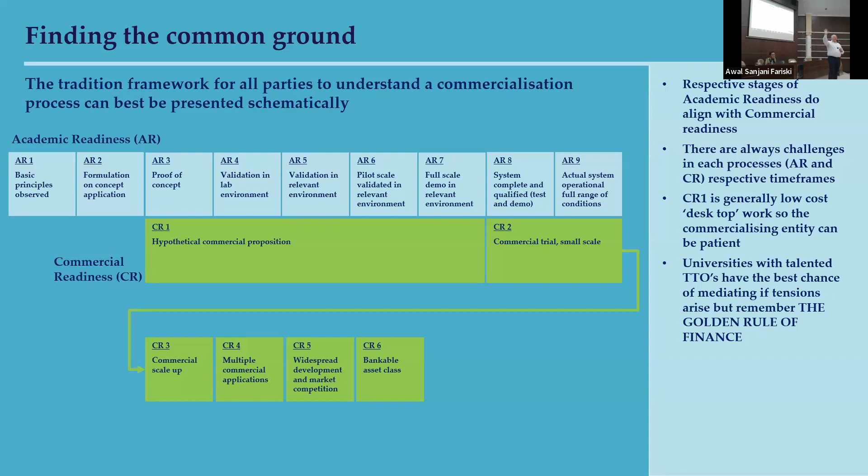And then you can see as the academic process goes through, where you get to systems being complete and qualified, you've done tests and demos, you've got actual system operations across a full range of conditions. So, for example, with our geopolymer cement, when we say full range of conditions from the academic perspective, it might be: does it work at 100 degrees Celsius, and does it work at minus 100 degrees Celsius, because it may get used in Saudi Arabia, it may get used in Mongolia.

So have we tested everything? From the commercial perspective, we then start dovetailing very nicely. We start doing our commercial trials, starting on a small scale, then we'll scale the commercial stuff up. CR3, CR4, we want to see multiple commercial applications to make sure it can work. CR5 is widespread development and market competition.

And then really what we're looking for, CR6, is the reason I used to get paid a lot of dollars at JP Morgan as opposed to standing here now. They would very much call it, in beautiful terminology, has it become a bankable asset class? Simplistically, can I sell it, and can I sell it for $1? That's just the textbook terms for it.

Before moving on, it's important to get academia to understand that kind of framework over the top. Now, most of you in academia are quite process driven. You've got that discipline, especially in engineering sciences, where it's a numeric-based discipline. You're very good at drawing up those plans and flow charts and making it work. That bit you've got down pat.

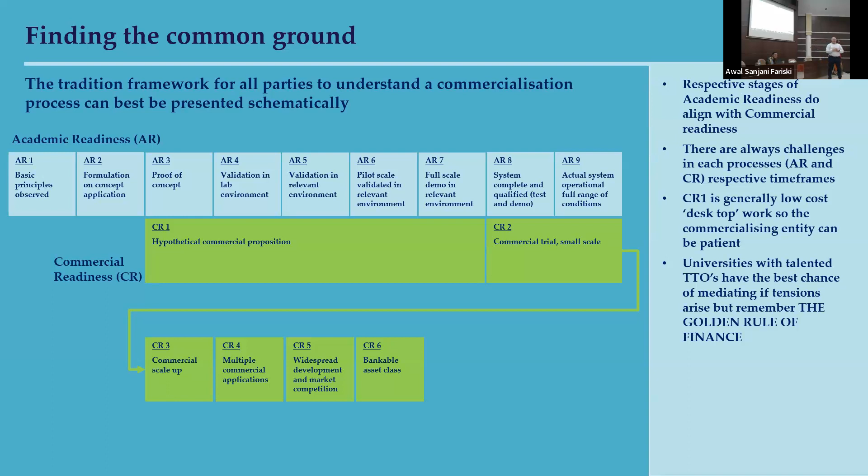So if we can go to the next slide, if you'd be so kind. I've kind of covered this, but I wanted people to admire my ability to find icons on PowerPoint to do this. So a current example, SUVO Strategic Minerals Limited, an Australian public company which I've covered, is working with Murdoch University on geopolymer cement and its commercialisation.

And as I said, part of being here today is we actually think there's potentially a role for ITS to be involved in that as well. So we both have a common goal.

Let me personalise it. There's Martin and arguably the other two professors into geopolymer, and anyone else here, you know, some of the master's students and PhD students getting into geopolymer. There you are, sitting back, dreaming away. You can see the stars, and I managed to superimpose some conical flasks on there. That's you guys dreaming away. Wow, we're going to make the perfect geopolymer cement. So your goal is, oh my gosh, how are we going to make it?

As I said, Aaron's and my goal, and anyone else in commercialization, we're sitting there going, oh, we can see the dollars, this one's a good one. How do we get the common theme? How do we get to work that together? Because, as I said, the perfect geopolymer binder is not necessarily the easiest one to commercialize. It might be that the third best geopolymer binder is the easiest one to commercialize because of availability of materials or the cost of the inputs or whatever. So how do we make sure that the academic world's striving for perfection is aligned with the commercialization world of having to make a return on our investment, or having to make $1 or a rupiah?

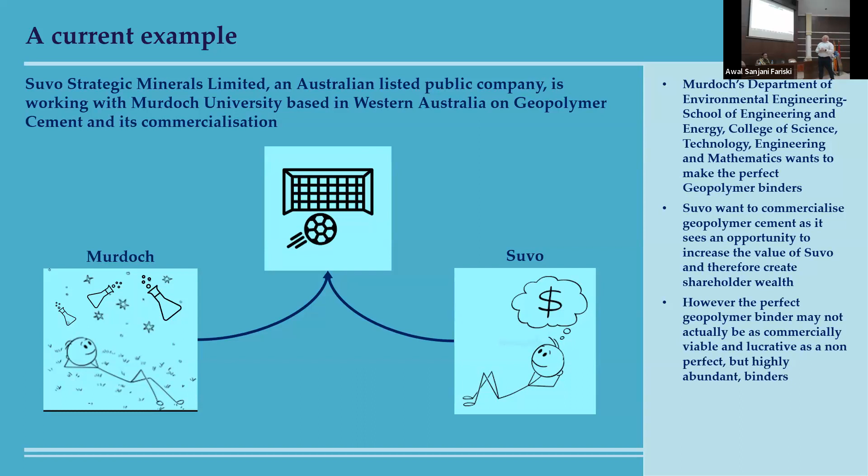Right, the commercialization mindset.

Let me just say, there is a section of commercialization which I'm not covering today, and that's the philanthropic side of commercialization. That's where someone, for reasons other than commercial motivation, is helping develop something because they see it from an altruistic perspective. It's like Bill Gates with his malaria vaccine through Africa. He hasn't done it for money. He's done it because he truly believes that's something he has the luxury of doing as a wealthy man to help the world. So my discussion excludes those commercializing for philanthropic grounds, or because of faith, where it's almost like zakat money as opposed to commercialization money.

So simplistically, it is all about the money from the commercial mindset. But we do go through a rigorous process. As much as I've said it's about the money, I assure you we go through very rigorous processes to do it. Depending on the complexity, it can be quite quick, 3 to 6 months, or it can take years for us to come up with those ideas. So imagine if it's going to take years - what do you think the single most important factor is for us to be successful over that period? The single most important factor is, can we all work well together? Do we understand the roles and responsibilities we all carry in trying to commercialize this opportunity?

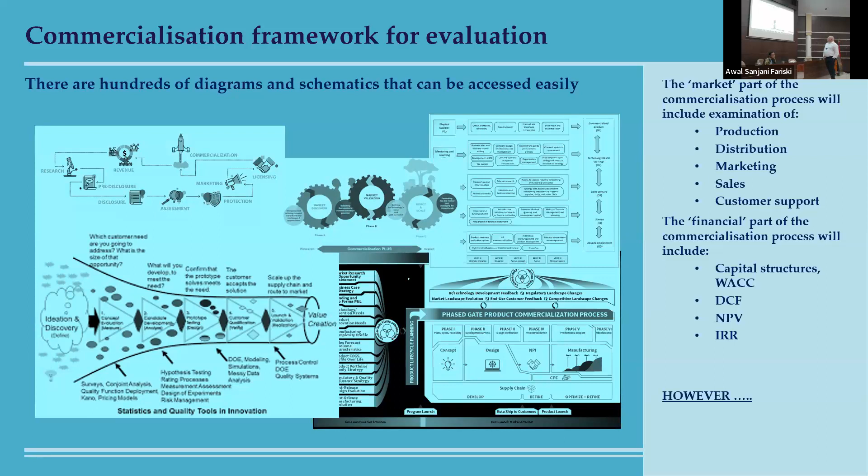This is the truth, and this is the stuff you won't learn at university unless you have people guest lecture and come along and tell you. From my perspective, and it is from my perspective, there would be people who don't agree with me, but they probably are still bankers justifying their existence. My personal view is it's never about the numbers.

So when we do all the work, when we do all our DCFs and NPVs and market studies on commercializing something, it either works or it doesn't work. Or if I try to joke about the Surabayan culture, which I always love when I'm here, it's either can or cannot, right? It's either I can or I cannot. So when it comes to the financial analysis, the depth of the market, is the opportunity really going to work or not - we can come up with an answer that says yes it will work, or it won't.

But then we get to the real issue, in my view. And the real issue is, have we got the right people to take this forward? It's not about the numbers. They have to be done, we have to prove that it can be commercial. But it's about, have we got the right people to be able to carry this forward to make it work? From my perspective, I look for the right academic team. From your perspective, you should be looking for the people you're talking to who've got the money - do you feel right with them?

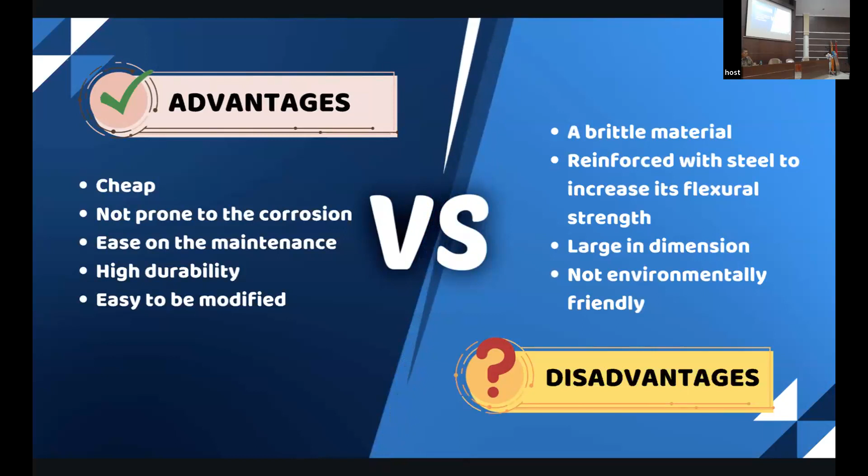And it's not environmentally friendly. Why is it not environmentally friendly? Because of this - the cement manufacturing. This is one example of cement manufacturing using the dry method. There are three stages that you can say are not environmentally friendly.

Why? For example, cement must be produced using limestone and shale or clay. Now, whoever's house is from Gresik must know - if you go to Gresik, let's say 10 years ago, you always played around near the cement factory. Now when you go back, the limestone mountain is already gone. Because the cement factory cannot regrow the limestone, so the resources will keep depleting until totally finished.

The next stage is the calcination, or the burning process, requiring a very high temperature - it can go up to 1,600 degrees Celsius. When you burn calcium carbonate from the limestone, it becomes CaO, calcium oxide, plus CO2, carbon dioxide. Those carbon dioxide will be released to the atmosphere. That's why if you keep doing this process, we get accumulation of carbon dioxide in the atmosphere eventually.

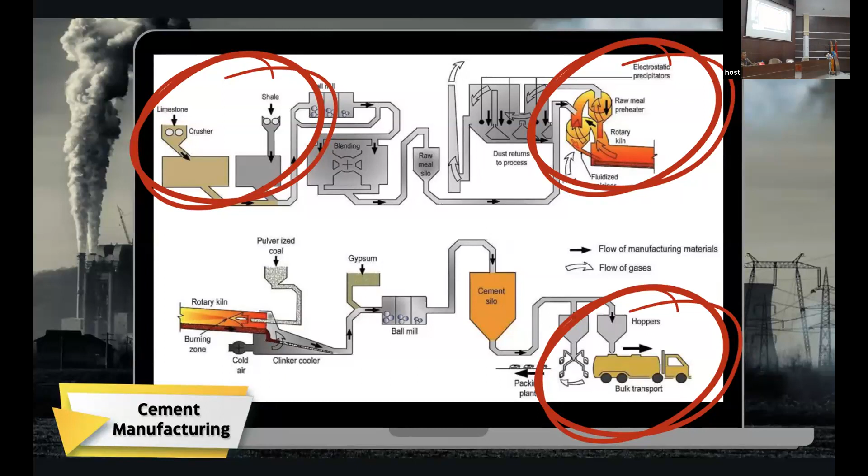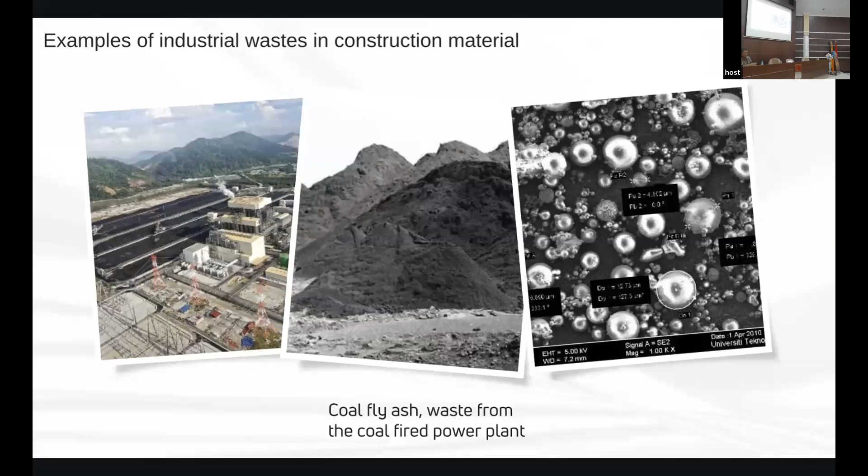By using fly ash. So clinker from the cement factory will be mixed with fly ash, will be mixed with ground granulated blast furnace slag, will be mixed with other components that are quite pozzolanic. That's why when you go to toko bangunan, you will find Portland Cement Composite - this is not OPC, the strength will be quite different. But PCC has a better environmentally friendly feature than OPC. You can say it's greener.

Next is silica fume. This one is quite famous, very famous, until the industry itself recognized its value and started to sell it to the cement factory.

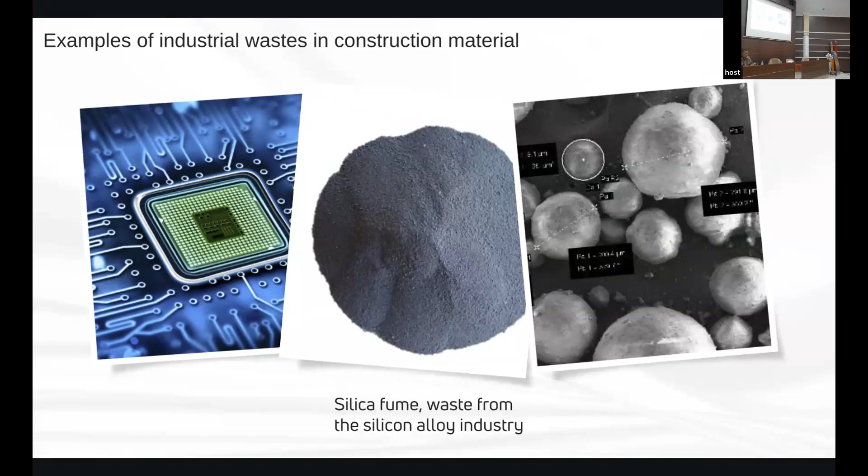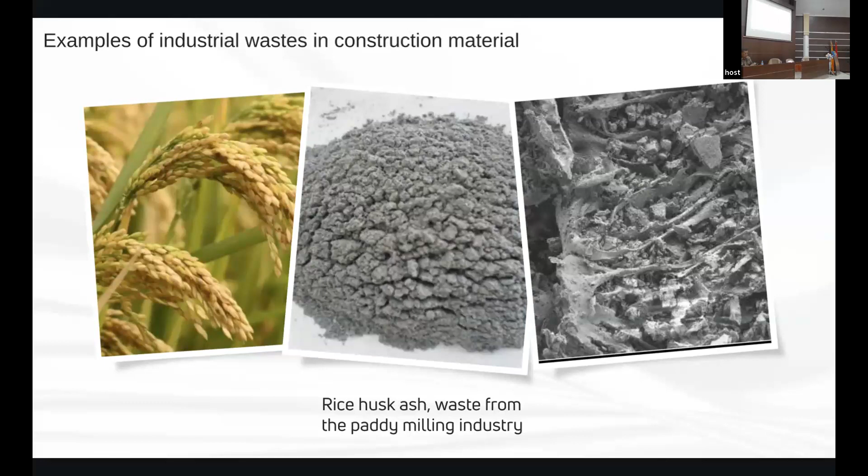This is silica fume. The silica in here can go up to 97-98%, quite high. And the one that's quite famous but nearly forgotten is rice husk ash, or RHA. Rice husk ash actually has silica up to 95%, and can go up to 96% if you do the treatment properly. So all these three materials, and other examples like palm oil fuel ash, sugarcane bagasse ash, and all those organic ashes, including slag, become pozzolanic materials, also known as cement replacement materials.

So what is the role of cement replacement material here? Cement, when mixed with water, undergoes a cement hydration process. That's the reaction - cement hydration. The hydration process will produce calcium silicate hydrate. This is the main support for the concrete. Other than calcium silicate hydrate, cement hydration also produces calcium hydrate.

Calcium hydrate is not really needed - it's not as significant as calcium silicate hydrate, but you cannot avoid it. It will be produced too. Now, what if you can convert this into secondary calcium silicate hydrate by including silica in the middle of it? So this silica comes from fly ash, from silica fume, from rice husk ash. So all this will contribute to the secondary calcium silicate hydrate.

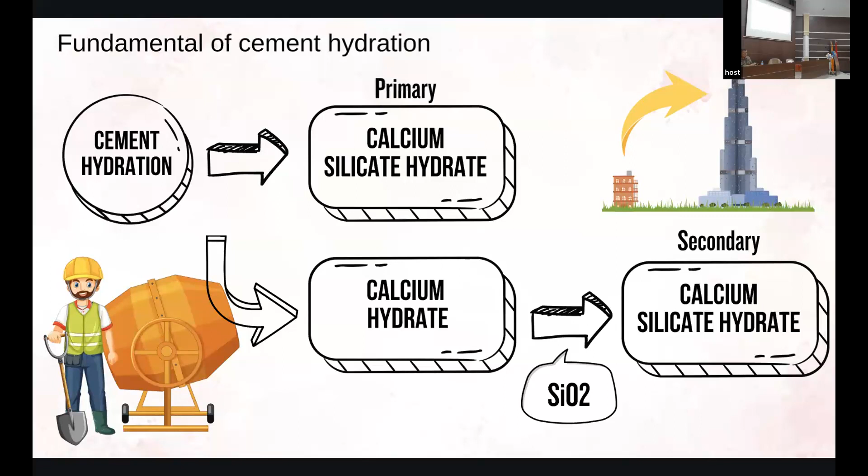So from here, people can build from 1, 2, 3, 4 story buildings up to the Burj Khalifa, for example. If you go deeper into the microstructure of the cement, this is what we call calcium silicate hydrate. Even though it looks like this, it's actually very strong. It's like a net, but the net itself is very strong.

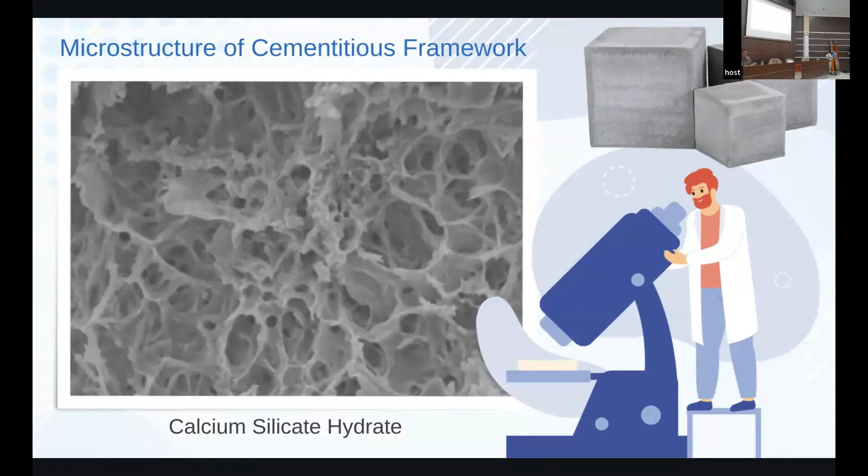And this is the significant outcome of using pozzolan or cement replacement material. We want to fill the gap between the aggregate and the cement paste. Let's say the silica - because it's quite fine, small - can go and stay inside the interfacial transition zone, and when the time is right, it can react with calcium hydrate and produce calcium silicate hydrate to connect the aggregate and the cement paste. That's why the strength can go higher.

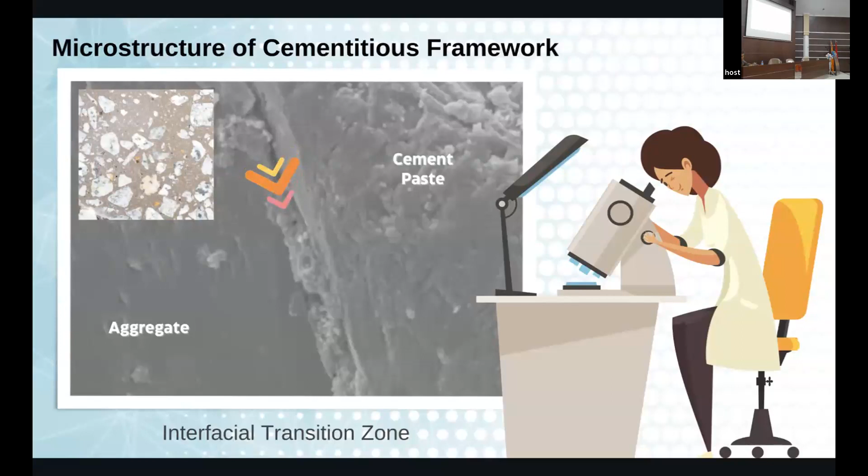So what are the examples? For example, KLCC is using high volume fly ash, HVFA. I think in Kampus Manyar, also in Sukolilo, they are currently studying using high volume fly ash in concrete proportions. KLCC, for example, uses what they call mascrete. Mascrete consists of 80% OPC plus 20% fly ash, and then they add silica fume to produce which grade of concrete?

80 megapascal. So let's say for a house, you only need 20 megapascal. To build a bridge, maybe you need 40 megapascal. Now, to build KLCC, or maybe the second KLCC next to Kampus Manyar, then you need maybe around 80 megapascal. Same goes for the Burj Khalifa - the highest grade, I'm talking about the highest grade. At the top maybe it's about 40 megapascal, but the highest grade at the bottom is 80 megapascal.

Same goes with the proportions - it has cement, it has fly ash, and it has silica fume. And the water cement ratio is quite low. That's why I think they include super plasticizer as well in this concrete.

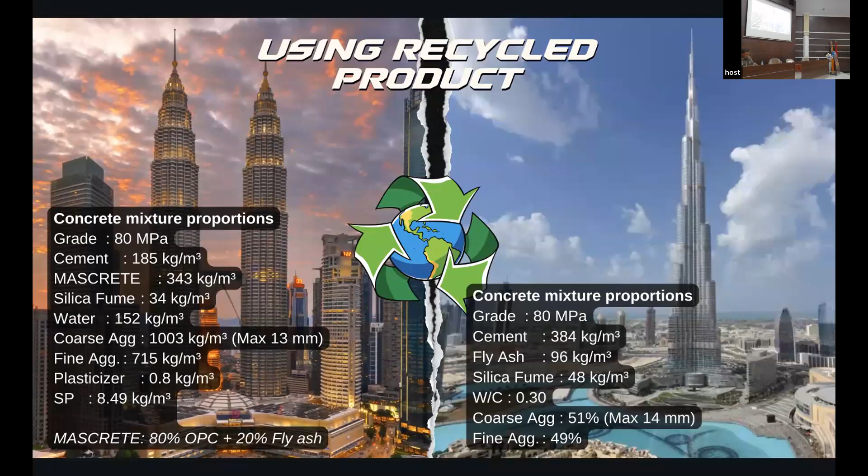So what is next? We have talked about the cement replacement materials. We have discussed fly ash, high volume fly ash. We now know about rice husk ash and also silica fume.

What is next, what I call the advancement of concrete? Isn't that already advanced? No - this you can say is already basic now. Everyone must do it because the cement factory already does it. PCC is a combination of clinker plus fly ash, clinker plus slag. That's why you have PCC. Now, actually, you are forced to do it until it becomes a habit. Once it becomes a habit, then it's already ordinary.

So what is next? We have this one, advanced concrete. I'll just show you 5 examples - 1, 2, 3, 4, 5 examples of advanced concrete in our field. So maybe next year, next 2 years, next 3 years, you will invent another advanced concrete that will be included in this list.

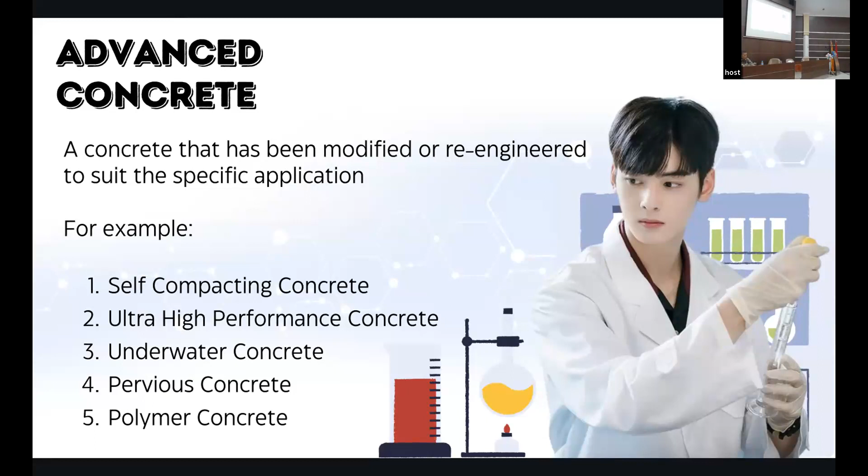I'll start with self compacting concrete, or SCC. The idea of using SCC is because the requirement of a building is no longer 4 stories, 10 stories - now it's already minimum 20 stories, 30 stories. And countries are competing to build the tallest skyscraper in the world. When you go to that level, the reinforcement is no longer ordinary, it becomes very dense. When you don't design the concrete properly, the concrete will get stuck in the middle. What are the consequences?

Your rebar can get exposed, or your concrete can be quite porous. So you have to make sure the concrete can flow and fill into the rebar, this rebar jungle. With normal concrete, you can just use a poker vibrator to make sure all the concrete flows into each part of the formwork. But for this jungle of rebar, it will be too difficult.

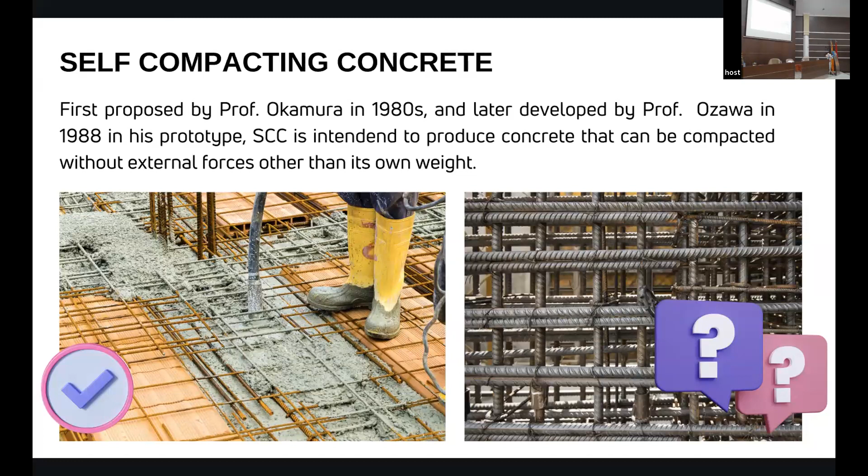In this way, you have to use SCC. This is one example of SCC. You don't have to compact the SCC. The SCC itself will compact and consolidate by its own, filling all the voids inside the formwork, even between the rebar.

What about the components? The components are similar. You still need cement, maybe grade 43 or 53. And then you still need the aggregate, but not too big, maximum about 20 millimeters. And you still need water. What kind of water? The potable one. All the water that you can drink is safe enough for the concrete.

And admixture. The admixture is what makes the SCC different from ordinary, normal concrete. The SCC here normally has two types, the chemical and mineral. Mineral admixture is needed to achieve the higher strength. The chemical admixture is needed to increase the flowability of the concrete.

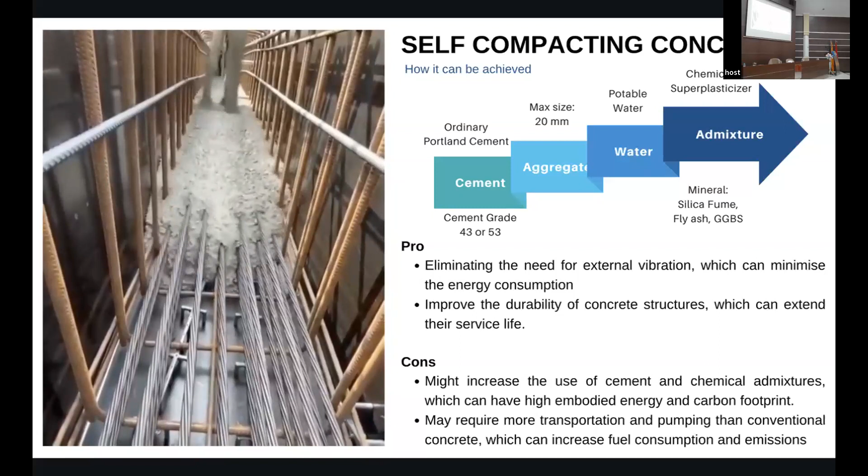So what are the pros and cons here? Pro: you don't have to use a vibrator to compact the concrete, you eliminate the need for it. And you improve the durability because every part of the structure and formwork will be filled with concrete. So you can make sure the rebar will not get exposed to the environment. You prevent the corrosion and damage of rebar, and you increase the service life.

The cons: you have to increase the use of cement, and you have to use super plasticizer, which is not cheap, so it's going to be a bit costly. And you may require tools to transport and pump the concrete from the ground floor to your site. That concrete pump is quite critical here.

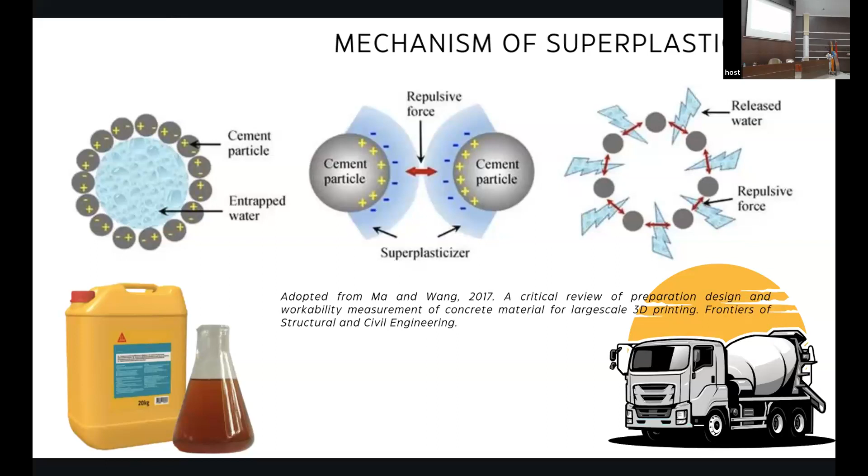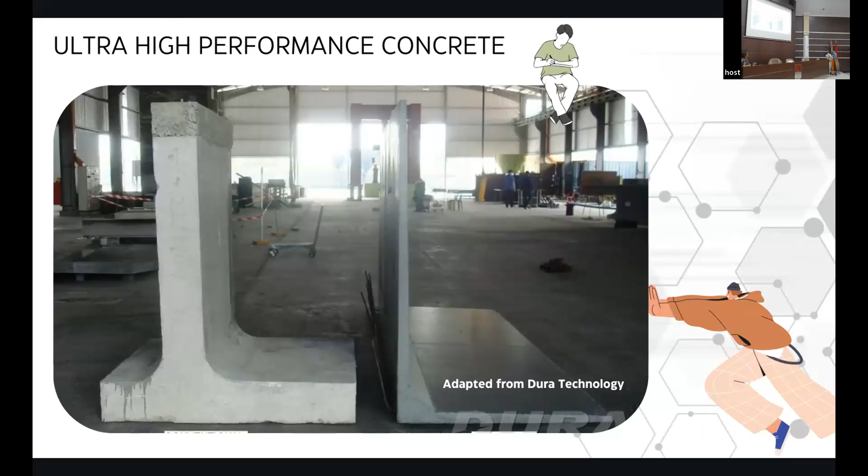Okay, this next one is about ultra high performance concrete. For me this is totally like magic. This is a normal earth retaining wall. Now people are already able to produce ultra high performance concrete using these dimensions. At first I thought, is that a steel plate? Because it's very thin. And then the owner said, no, it's concrete. I was totally amazed when they explained about this product in the first place, because you can have so many advantages with this kind of concrete, to be honest.

Normally we have normal strength concrete from 25 to 60 megapascal. And then you have high performance concrete, the range can go from 65 to 105 — this is the one used by KLCC and Burj Khalifa engineers. Now, the latest one is no longer high performance, but ultra high performance. The density remains the same, but strength is increased up to twofold. The modulus of elasticity increases up to 20% higher. Water porosity decreases to lower than 10%. Imagine the durability — water absorption after 30 minutes is only 0.5%. So it means if you are using this structure for a water retaining structure, it is capable of doing it.

How do they make the ultra high performance concrete? Similarly, they still use cement. And then they have fine sand, but they use silica fume — remember the 95% silica inside it? And then the additive plus micro steel fiber.

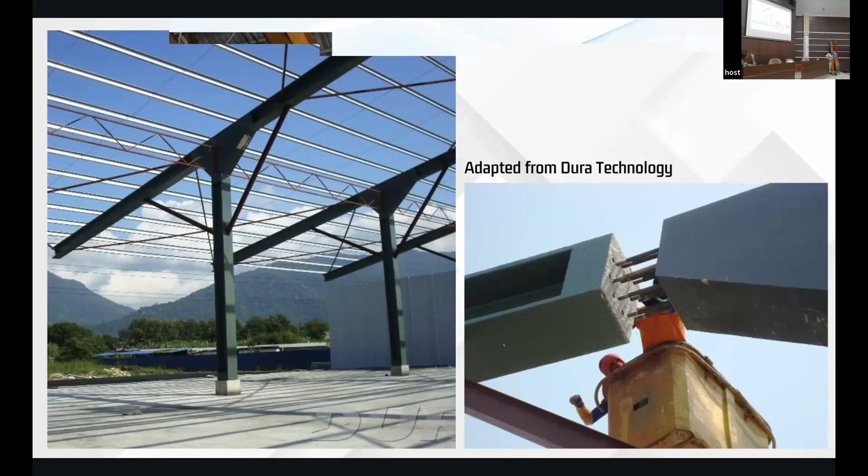And the latest project, they use it like a girder. If I'm not mistaken, the span is about 105 meters, without a middle column. One totally big achievement, right?

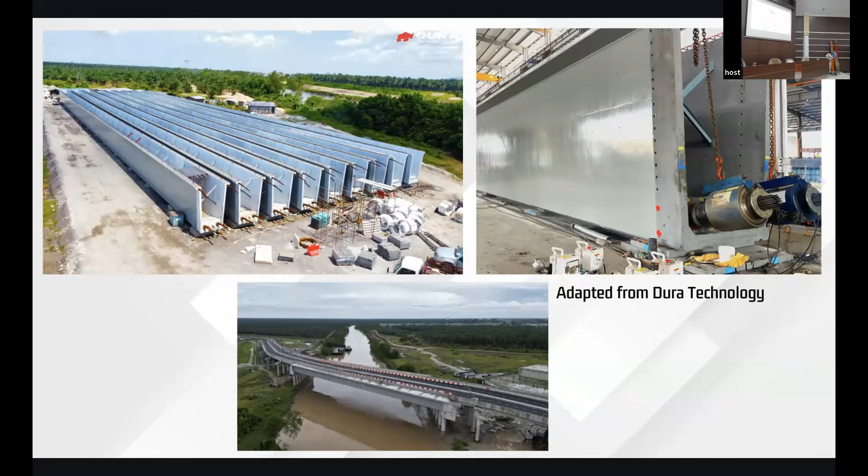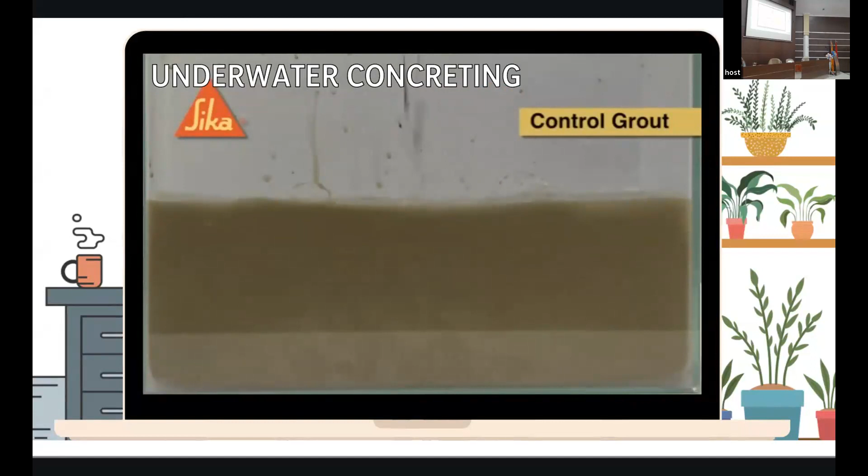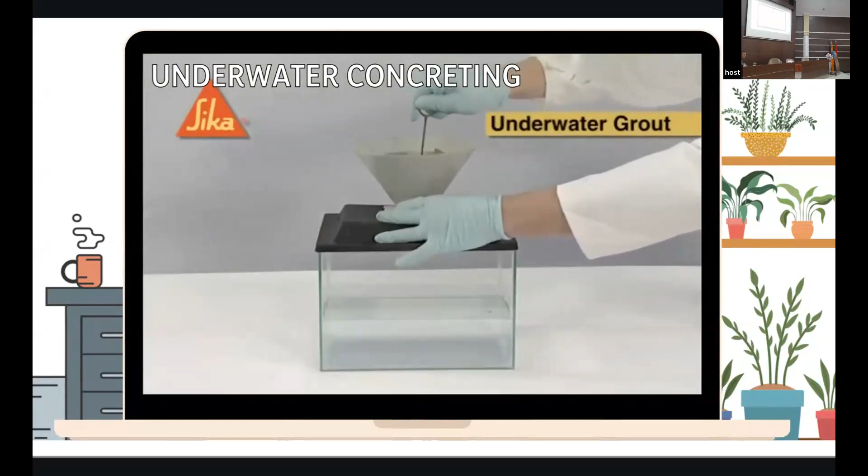Now, underwater concreting. Underwater concreting is like a new advanced concrete. Normally, when you are using grouting, nothing special happens to your concrete when you use normal grout. You mix your grout material with water, put it into the water, it will disperse, as easy as that. So what Sika does, they put an admixture in it.

When you need the cement paste, or maybe you need the concrete for underwater, it will not disperse. So you don't have to build an enclosed area for your project. You can totally build a formwork, pour the concrete inside it, and let it set and harden until the desired strength.

This is an example of underwater concreting, where you can just build a formwork, pour the concrete inside it, don't mind about the water, and then just leave it carefully until the formwork is filled. That's how they do it.

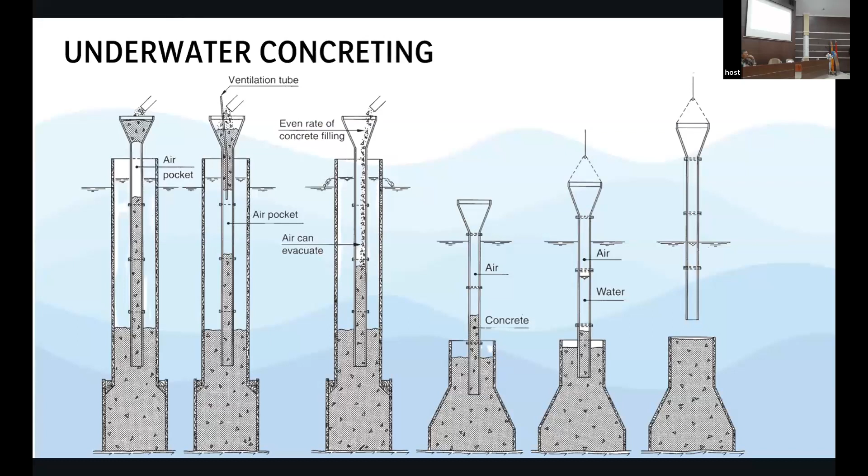Still okay? Okay, now pervious concrete. This maybe has already gone viral on social media. In Jakarta it's called sumur serapan. Now in our field we call it pervious concrete. Not from a hole made specifically for that sumur, but we make the pores themselves act as the hole.

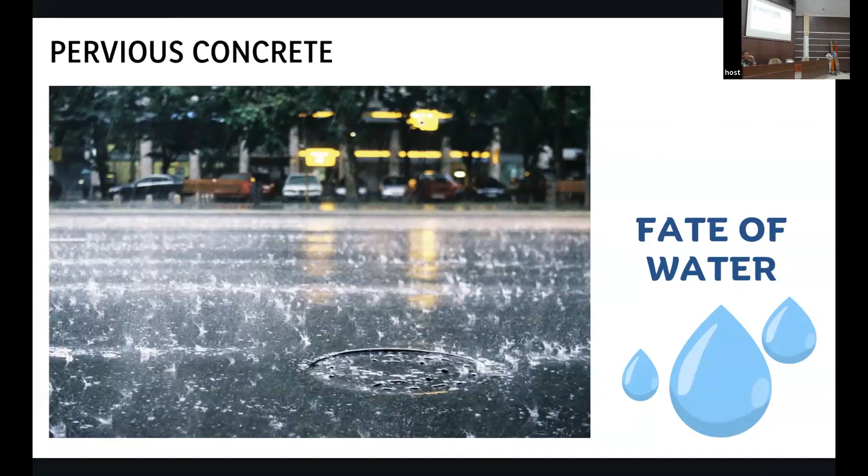Because if you look at this picture, we call it the urban heat island effect. This heat island happens because all the ground, all the surface, has been covered with asphalt, with concrete, with buildings. There is no longer grass. If rain comes, it just flows into the drainage, into the river, and finally to the sea. There is no period for the water to seep into the ground and cool down the environment over there.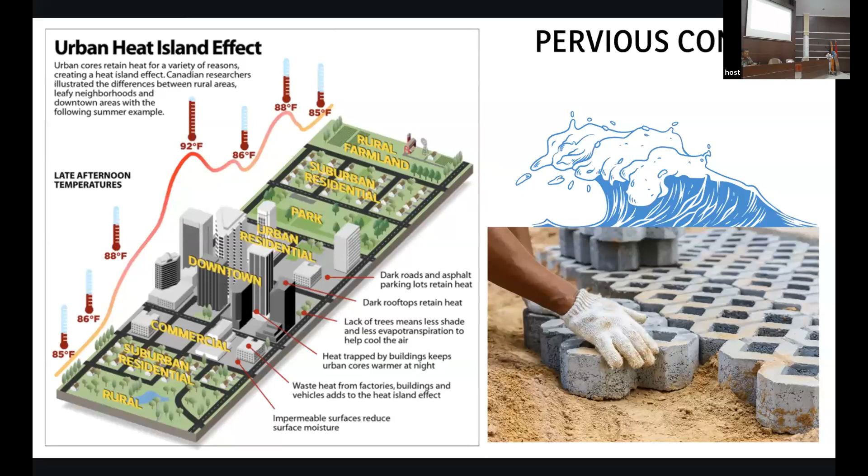That's the concept of sumur resapan. You can see the temperature near the downtown area compared to the rural area is totally different, because of this concept. Now, what the engineer is trying to do is create pervious concrete.

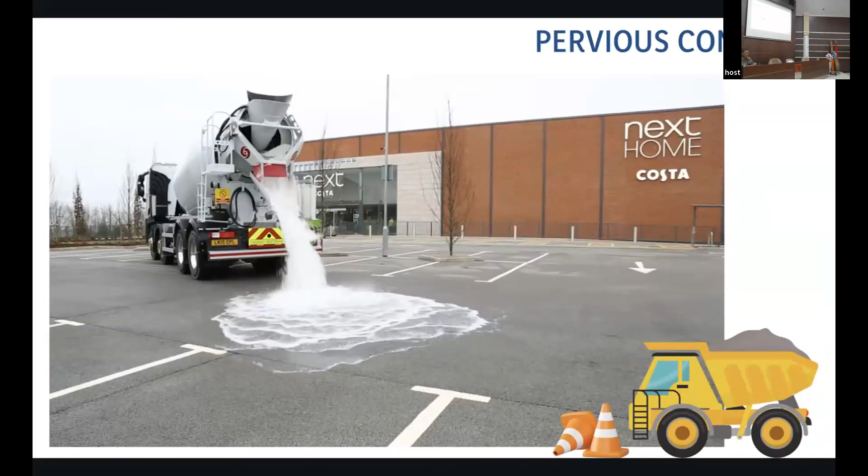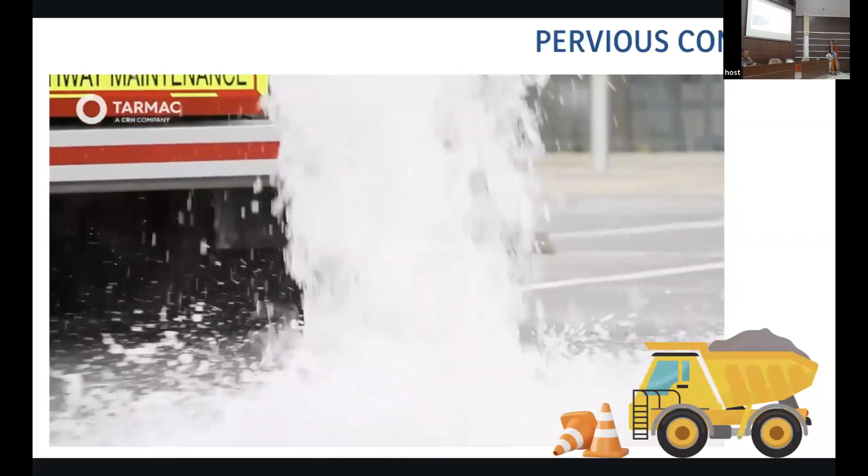They make the concrete as a container for the rainwater. This pervious concrete is actually quite porous, but the water is not going into the concrete, it's passing through the concrete. So what they have here is like a pool.

Here it will be filled with gravel, batu, diisi dengan batu, kemudian ditutup dengan pervious concrete. Anytime hujan turun, air nggak akan menggenang. Dia akan turun, masuk ke dalam kolam ini, kemudian dialirkan keluar ke drainase kalau sudah penuh.

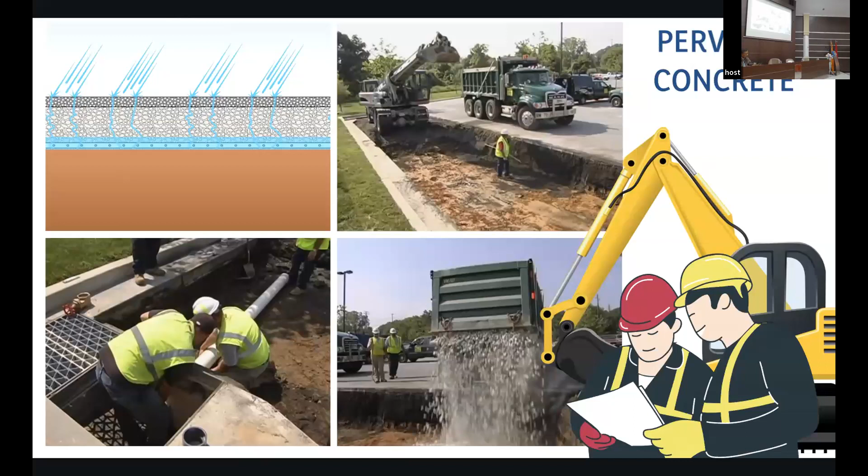Right, now the last one about geopolymer concrete. Where is Mr. Hugh? I have the recipe for him.

I want to give him the recipe of geopolymer concrete. When Mr. Hugh said metakaolin is a super juice for geopolymer cement, this is it, because metakaolin is actually kaolin that is calcined or burned at a specific temperature, 750 degrees Celsius, for 1 hour, until it produces metakaolin. When you mix metakaolin 750 with slag and alkali silicate, you produce geopolymer.

When it's rock-based geopolymer, you produce it with volcanic rocks and mine tailings. Now the one that is very famous is fly ash geopolymer. We don't use metakaolin, we use fly ash, because fly ash is available in abundant amount. If we can consume that fly ash, at least we can contribute something to the environment. This ferrosialate-based geopolymer cement also uses metakaolin. So you can see metakaolin is a super juice for geopolymer.

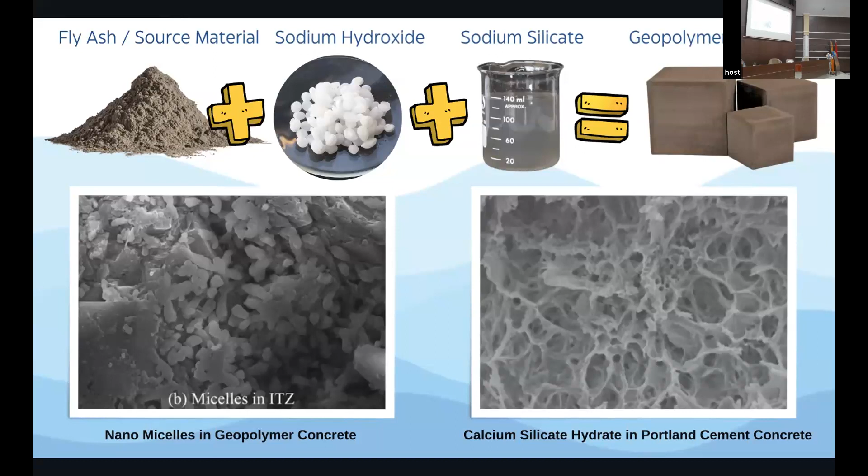We are trying to convince our government, but they are still hesitant. I think we have to take the risk, building our own structure, like what Dura did earlier. He built his own factory using his own material and showed the people, this is what I sell, and this is the outcome.

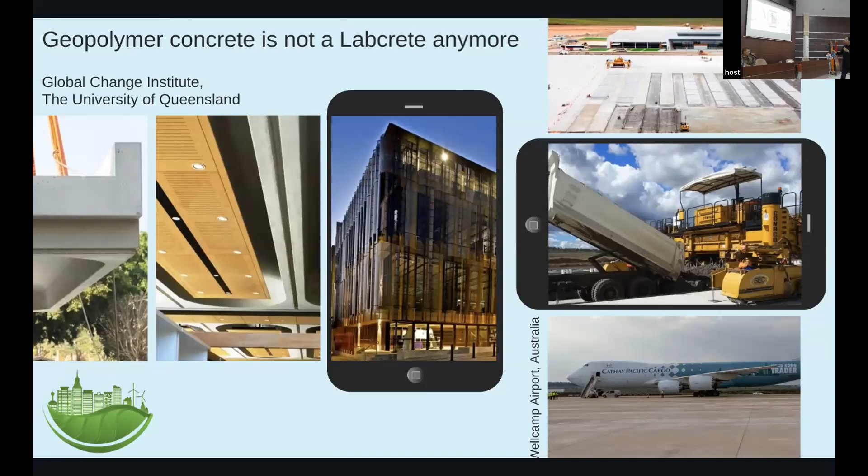I think I can show you this one. For me, the limitation will be the strength, right? Karena scope of geopolymer yang kita punya saat ini adalah di normal strength. Hanya di normal strength, sebab ada restriction untuk setting time, ada restriction untuk curing, dan restriction lain seperti kualitas raw material itu sendiri. Jadi apa yang kita bisa capai sementara ini ada di normal strength.

Kalau kita ingin membuat contohnya skyscraper di sebelah kampus Manyar, pengennya 100 megapascal atau 80 megapascal, saya agak khawatir belum tercapai dengan menggunakan geopolymer. Masih harus menggunakan traditional cement. Apalagi kalau mau menggunakan UHPC yang strength-nya sampai 175 megapascal, sekarang ini geopolymer masih belum bisa mencapai itu.